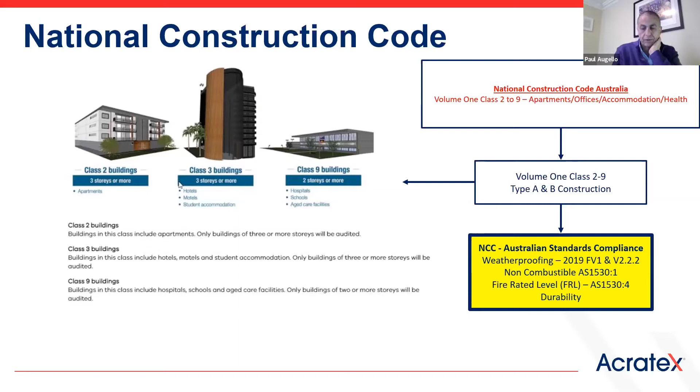So what does a pathway look like? This is what we have learnt in the marketplace, talking to the various industry bodies, including the building certifiers, who have got the hard job of trying to make play of all this and interpret the building code, and at the same time allow the projects to continue to go forward as well.

So what we've got in the middle is obviously our compliance rule book, which is the NCC, around what they think is non-combustibility, the weatherproofing requirements, and then durability within that NCC Volume 1 construction, for Class 2 to Class 9 buildings. And we actually split this into 2 halves.

So if we took the left-hand side to start with, within the NCC there's a definition under render, and there's various definitions under render in there as well. They've also got a definition there for texture. But where that texture definition sits really is within the Australian standards, but more importantly, it actually only comes out of the construction dictionary.

And what we've learnt in this is that a lot of the surveyors don't use the construction dictionary, or not a lot of industry bodies actually use that dictionary for interpretation or terminologies of descriptions of particular items when they're not listed within the actual NCC themselves.

And it's how do you actually bring all that together to try and work your way through this pathway with it. And both texture and render are actually listed in those dictionaries, which are very, very clearly defined on how you can actually interpret that. So that's looking at it from the NCC's point of view.

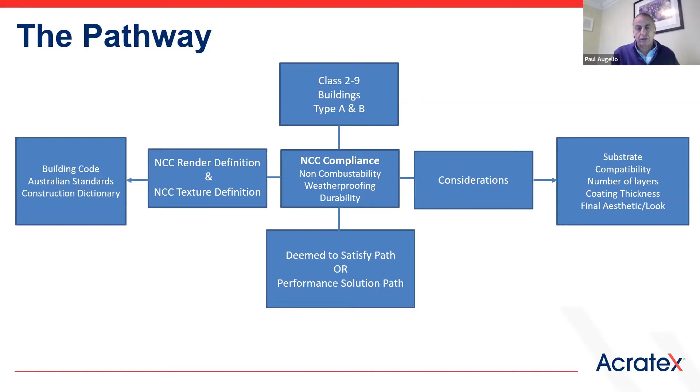And I think what we're going to present today has got a path to demonstrate that through it. It's just how we then present all this to the surveyor, which is very, very critical. So if we start off with the interpretation around render, and I'll use that word very loosely, because where render sits today in everyone's definition is completely different to where it was 10, 20, 30, 40, 50 years ago within industry.

I've set this up as 2 parts. Part 1 is how it's defined within the building code, or what we use as the construction dictionary under the HB50 classification, which is pretty straightforward, as we all know what render is. It can be a site mix, sand, cement. We add some lime, some additional additives to apply onto an external wall finish. And that's generally the way render's been used for the last 100 years, mixed on site.

In July 2020, because of people not understanding where render fitted into the whole category, the ABCB put out a communication piece to the industry relating to render. They basically said that all renders need to be non-combustible and there will be no concession under C1.9. However, what that article didn't go on to say is how that then comes into play as a total system when they're only defining one layer of a total coating system.

And we'll get through this as we talk, but the article still sits there today. If you look at part 2 of what renders are, which is what render is about today, render is no longer mixed on site. There are sort of exceptions to the rule, but 99% of the stuff that we see used today, render is applied, comes in a bag.

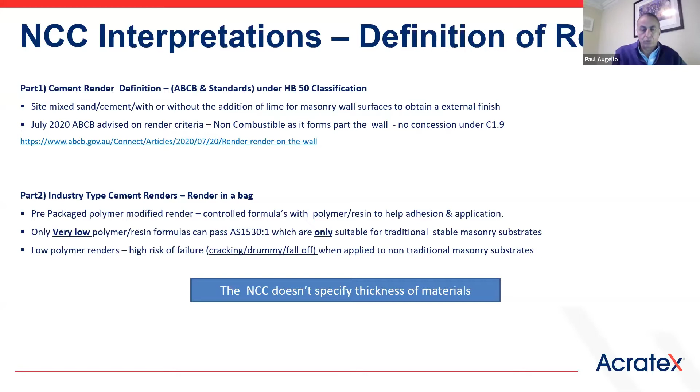as well. So if we look at this perception of what render is, what we think it is, what the building code tells us it is, it's sand, cement and lime with polymers and additives in it, which is consistent with what it used to be and what it is today when you see it coming out of the bag. Unfortunately, the market's changed so much that the perception now of render is this aesthetic look that I achieve, that I've got on the wall.

And what's being missed in the whole interpretation is that achieving that look is done in various ways. And that's the critical part here: to achieve that look that everyone perceives as a render, it's generally a three-layer system. A being the base coat, which generally levels off the surface, which can be 2 to 4, 6 mil, depending on what surface you're putting it over.

You've got the texture coat, which is under 1 millimeter thick, and that's really what gives you the aesthetic look, which everyone refers to as this render look, because that's the part that actually looks like render. And then you've got a protective coat for weatherproofing purposes and keeping the surface clean and maintenance free that sits over the top of that.

The base coat is the critical part here, because base coats vary in 2 types. There's a cementitious material that's used for those surfaces, as I said, block work, AAC, and precast and off-form concrete. And those cementitious materials are the only ones deemed non-combustible, that have been tested and passed AS 1530 Part 1, and are only suitable for those materials.

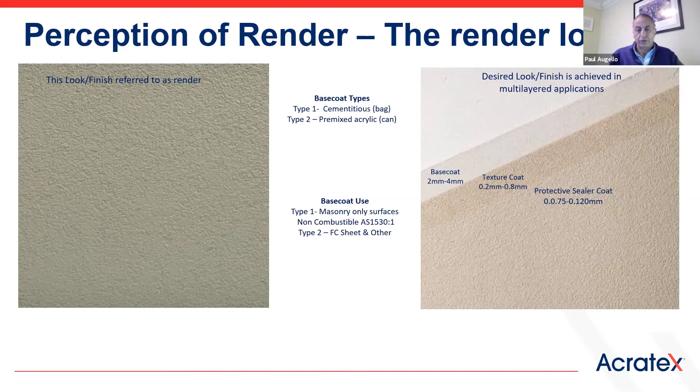Type 2 of a base coat is what we call a pre-mixed material. So this is more of an acrylic material, ready for use. They're only suitable for the more non-traditional materials like fibre cement sheet or similar to those types of materials. And those materials can't be tested to 1530 Part 1. So it takes it down a different path of where those materials actually sit as a definition. Which leads us into this textured paint interpretation.

So we've covered off what the render definition is under the NCC, and then what a perception of a render really is and how it comes together. This is the most critical part, because understanding a paint texture layer is what really gives you the final aesthetics, and is that middle layer. So if we start off with paint as defined within the building code, it basically is a product made of acrylic polymer and resins as the prime raw materials. And 100% of paint products on the market are basically around those types of formulations.

And we also know under the NCC, under C1.14, Part 1, Part I, that paint is exempt within the building code. So we know that paint's made out of polymer and resins, and those polymer resins are no different to what are used in other similar materials. And we also know that paint's exempt. If we then take that one next step, what is a textured paint? The textured paint being defined is what gives us that textured look.

So as defined within the building code or the construction dictionary, this is the underlying part of it. A textured paint is commonly not a flat finish, and is there to provide the final aesthetic layer to give you that look that you're looking for. And again, when the ABCB released that note back in July last year, they referred to that aesthetic look as the textured paint, therefore making it an exempt or an ancillary item under C1.14 as well.

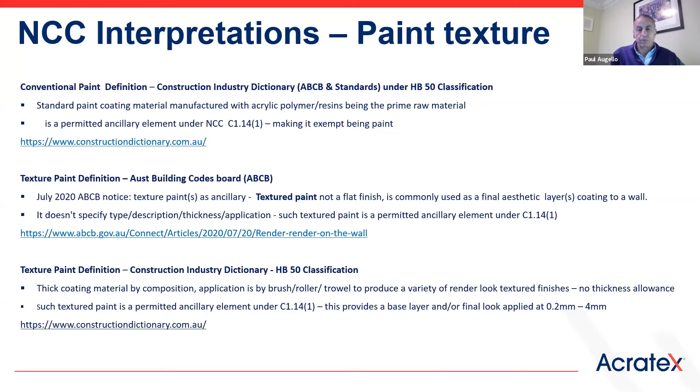So under that ruling, that sits into your C1.14, and this particular layer, if we call it a layer, is generally applied between 0.2 of a millimetre and can almost go up to 3-4 millimetres, depending on the composition of the product and what it's fit for purpose. But the core part of it is they are all the same when you look at a textured paint versus a normal conventional paint. They have all the same type of polymer compositions within them.

So if we then take the next step and look at paint versus a paint texture as defined, we know that paint's got a polymer resin, and a paint texture put on with a roller to give you a fine medium texture, or a paint texture put on with a trowel, are all sharing the same polymer technology across the three technology bases. What differentiates the three is the actual aggregate or particles that give you that final aesthetic look that everyone's now seen in the marketplace as the render look.

These materials are generally applied anything 0.5 to 0.8 of a millimetre, even over 1 millimetre. So we're talking all up around 1,000 microns in paint language, or down under. But I suppose the underlying factor here is that all these sit on the same polymer resin, and when we know that paint becomes exempt under the ancillary item under C1.14, our interpretation of this is that paint texture, whether it's roller applied or trowel applied, falls under the same definition through their composition.

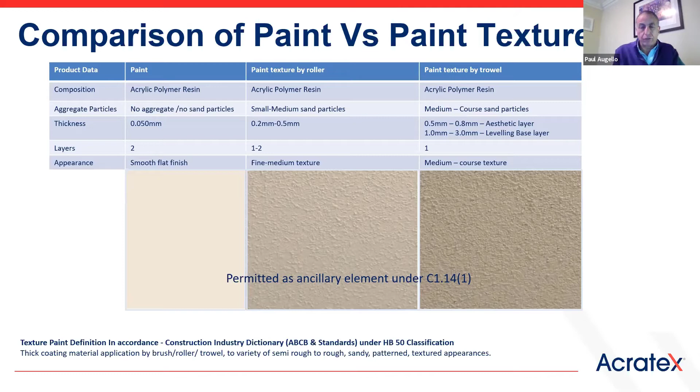So the challenge has been to understand that the textured paint is perceived as render. That's where the big challenge has been, because the surveyors see this perception of, I've got a look, it's render, so it's got to comply to 1530 part 1. So that's one of the challenges that we've had.

And through the last 6-12 months, what we've done is broken this into layers so that we've got a three-layered system to deliver both the aesthetic elements and the fit for purpose elements that work around the NCC compliance. So if you took layer 1 being the base coat, depending on the substrate, being masonry, all your masonry substrates including AAC, that's where you can use a 1530 part 1 render, which is a cementitious material, which is a type 1.

If you took the type 2, being more of the high polymer pre-mixed materials, which we believe are deemed as a textured paint based on the interpretations that the rule book allows you to work with, these are suitable for all your fibre cement sheet systems on the marketplace. You would not use a type 1 cementitious material over fibre cement sheet, but you could do the other way around because of the technology.

Layer 2 then becomes the aesthetic layer, which is what everybody's really wanting, the aesthetic finish. And again, same compositions. These are all textured paints that can be applied in different finishes. And then layer 3 becomes the protective paint membrane system, which provides the weatherproofing and the longer term performance in relation to the aesthetics, keeping the building looking good longer as well.

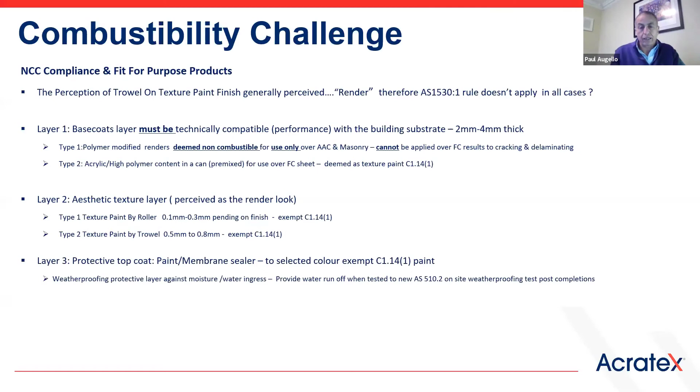So if we now take it into what a specification primarily looks like by substrate. If we look at Hebel AAC, for example, stepped over a 3-layer system, you've got layer 1 being the base coat material, which is generally what we call a pre-packed render.

And in this area, we've had a product tested that complies to 1530 part 1, which incorporates the mesh, because one of the requirements for AAC is that you need a reinforced alkali mesh within to cover your joints, to take movement over the joints. So that first layer, render and mesh combined together, complies to 1530 part 1.

The next layer, being the aesthetic layer, being the textured layer, that's where your variations come into play in relation to the aesthetic finishes, applied either by roll or by trowel. They would fall under the C1.14, in our opinion, being a textured paint and the ancillary item. More importantly, what we've also done is that we've tested both paint materials and textured paint materials to 1530 Part 3, which is generally the rule of thumb for building products, to determine their ignitability and smoke, and they all fall within the same test results when you look at the test data 1530 Part 3 as a guide.

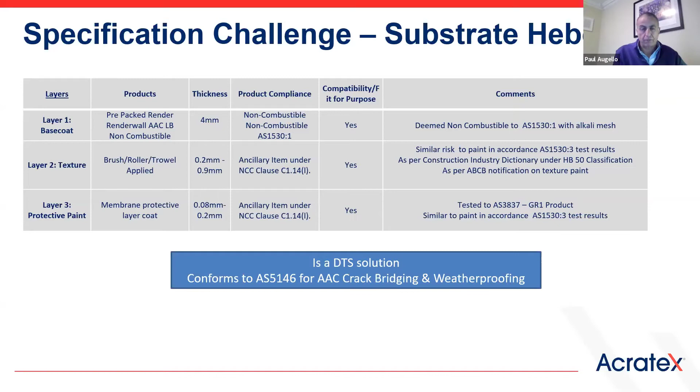And then obviously the last one is that paint membrane, which is that important part of the layer, which is actually a Group 1 product. So that adds that little level of more comfort to the whole thing. That complies with Group 1. So when you put the 3 layers together as a system, which is the way we're generally representing these, it does 2 things in our opinion. You've got a deemed to satisfy solution based on how each of the layers can comply, and B, it'll comply to 5146 in relation to weatherproofing and crack bridging as well when you're using this. And primarily, this is what we're looking at here.

So if you look at the left-hand side, is typically what a 3-coat system would look like over AAC with the mesh embodied into it. As I said, the previous slide, the non-combustible render with the mesh has been tested as one system that complies to 1530 Part 1. Or on the right-hand side, where we've got a roll-on texture that also can comply as well. So it gets down to the aesthetic finishes of what's really needed for the actual individual project. But both those systems are a deemed to satisfy path solution and would comply. And this is the way we've been presenting them to the surveyors and having reasonable success.

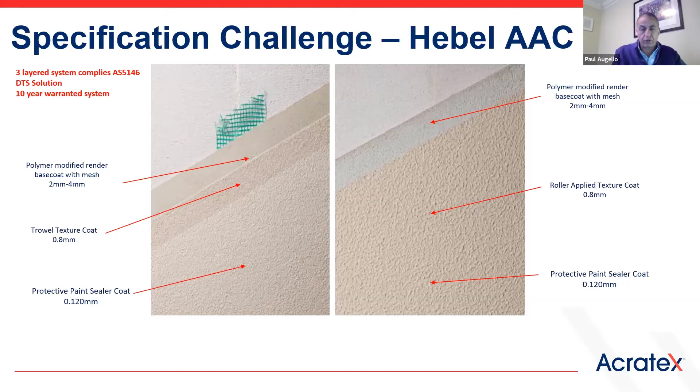The next one is fibre cement sheet, and this has probably been more of the challenging one. There's two types of fibre cement sheet, a recessed or an express jointed one. So if you look at the recessed edge one, which has been more commonly used, there's a jointing compound that goes to the joint first. That, in our view, is a paint texture, and that's required with a mesh in it again for the joint elements. You've got a levelling coat that's generally applied to 2 to 3 millimetres, which is premix as well. And again, that layer is a paint texture, and so is the finishing texture coat, which gives you your aesthetic part of it as well.

And again, all these materials, when you look at their composition, fall under that definition of a paint texture under the HB50 classification within the construction industry, which is put on either by brush, roller, or trowel to provide these different finishes. But again, there's no requirements in that criteria where it talks about thicknesses. And this particular system, when combined together over fibre cement sheet, you're generally looking at about a 3 millimetre layer that'll sit over the total surface in that particular area there.

So this is what we're looking at in summary. A typical reinforced fibre cement sheet system. You've got the joint system there, which has got the fiberglass reinforced mesh. You've got a levelling skin coat, around 2 millimetres, and then you've got the textured layer coat for aesthetics. And then you've got that protective layer coat that sits over the top. And if it's interpreted the right way, you've got a fit for purpose system. You've got a DTS solution with a warranty system, and it will be exempt under C1.14, in our opinion.

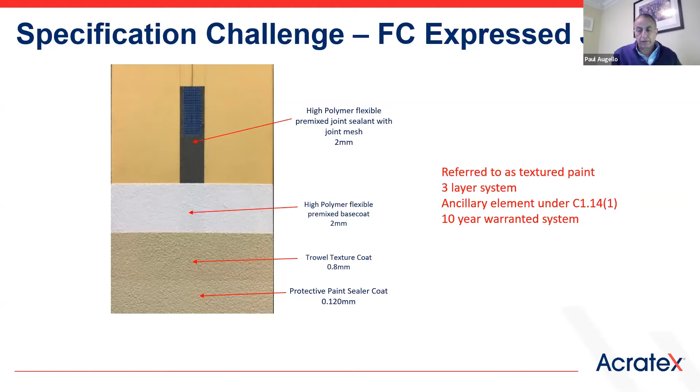The last one is the express jointed system, and this has probably got the most flexibility of all the substrates on the market at the moment, where I've got options of using a roll-on texture or a trowel-on texture, depending on what you're trying to achieve. But if you look at the system in its entirety, you've got layer one, which is basically a primer undercoat. So that's exempt being the paint under C1.14. You've got a roll-on texture to give you the aesthetic requirements, again the various finishes of different thicknesses. And then the last thing is you've got that protective layer top coat, again, that will give you the weatherproofing to the total system for maintenance purposes over the long term as well.

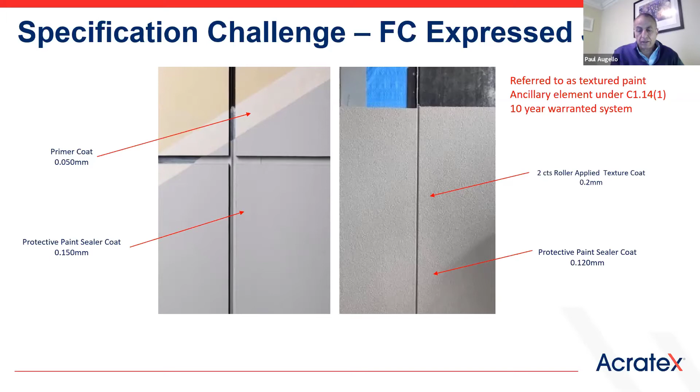And primarily, this is what we're looking at when you're looking at express jointed systems, and they're being used a lot. If you look at Victoria, what's happening with the CSV projects, there's been a combination of this and the AAC being used on all these projects, and generally this is the way they're all being presented to demonstrate a pathway to compliance that's being considered by the surveyors in this particular area here.

Those get dropped into the burner for 30 minutes. As soon as any flame ignitability comes in within a certain part of that test, it's deemed as a fail. So it's a really, really severe test to actually pass. This is where the explanations come into play, where when people think of a render as just this look, that's where you've got to break this thing down into the layers.

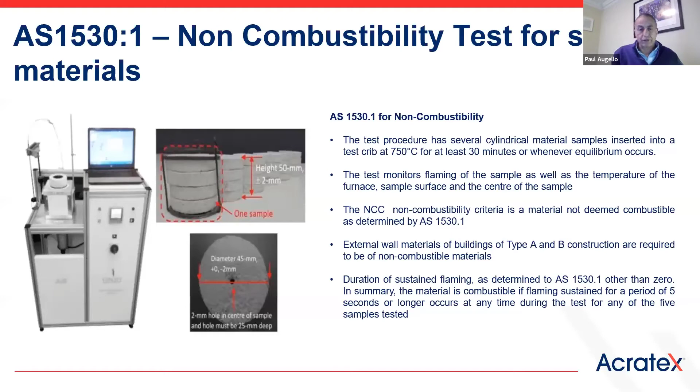Nothing has really changed. What's changed is because we've had all these ACP fires that have occurred, unfortunately the rules that are applied now for ACPs have been adopted over to coating systems with other cladding substrates underneath as well. So the challenge has really been breaking this into layers and defining which of these layers can be non-combustible, and then which of these layers deliver the aesthetic parts but can also be defined under other interpretations of the NCC that give us those exempt rules, allowing us to apply those exempt rules within what the rules allow. Alexia, that's it for me.

How are we going for time? I suppose I'll hand it back to you now to have a look at what questions we've got. Great, thank you. Paul, if we could take down the slide, brilliant. I'm going to turn my video back on.